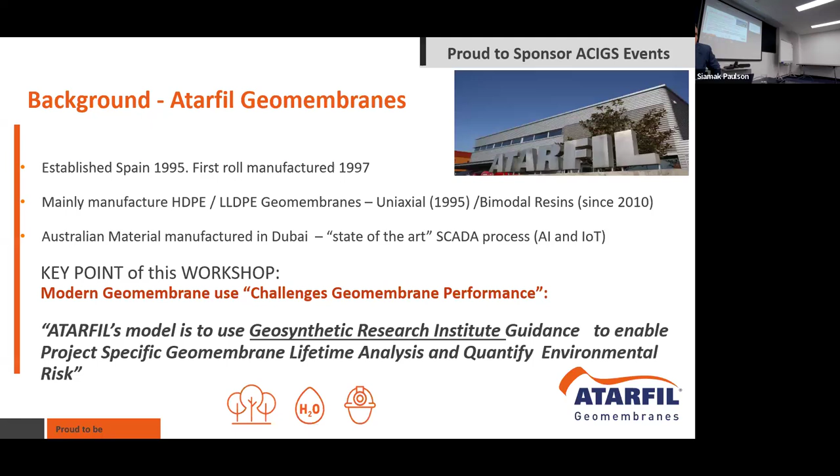But I guess the key point of this workshop is modern geomembrane use is challenging geomembrane performance, and that's both chemistry and modelling and leakage rate analysis wise as well. So really the Atarfil model is to use Geosynthetic Research Institute guidance to enable project-specific geomembrane life analysis, and that gives you the ability to quantify this liner's environmental risk over time.

There's a few challenges in geomembrane design, and I don't want to take George's thunder, but we see these as critical. GM42 talks about extreme project conditions, and that's always been a challenge for liner design because it crosses that boundary between civil engineering, geotechnical and polymer expertise.

So Atarfil have got a team of internal chemists, and we also consult external polymer laboratories like Excelplas fairly heavily. The other thing is, what properties do you test in a lab to try and replicate site conditions has always been a major challenge.

So traditional testing really means you're isolating chemistry and temperature versus UV versus oxidation in air and things like this. We're using parameters like stress crack, OIT and HPOIT. They're really indirect measures, but we're trying to model them quite closely to establish geomembrane life.

So the third challenge, and this is a big one for all designers, is how do we do this in project timeframes? When true performance benchmarks are projects in situ, your geomembrane in situ, or long-term immersion testing - I know Kerry Rowe will tell you 5 years is a good thing, but it's a challenging thing when you've got a project that's 3 weeks to 3 months in design.

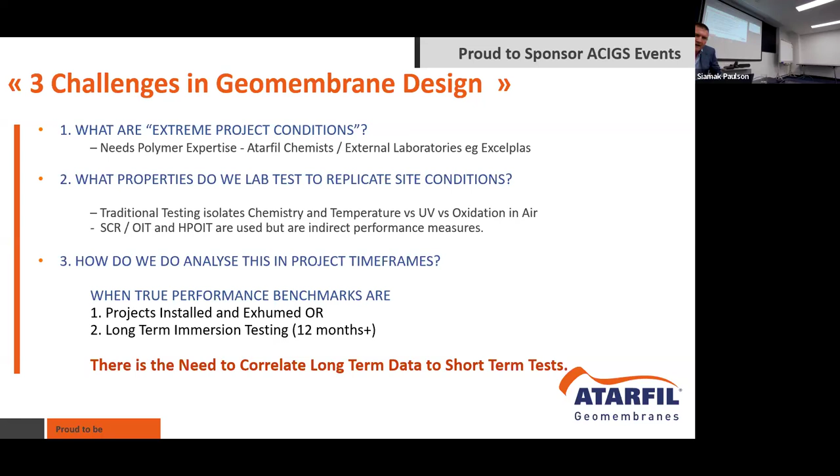So there's a need to correlate this long-term data to short-term tests, and it heavily involves what Atarfil do. The Atarfil solution to try and accommodate this is encouraging site coupons and encouraging exhumations wherever we've got projects installed. Sort of 30 years of project history is allowing us to correlate that. So we do undertake a lot of long-term immersions on your projects.

And the fundamental aim is to create site-specific geomembrane recipes. We've modelled the ageing, we try and create the recipe to suit. So the second aspect of it is project timeframes. We try and correlate long-term tests, all these exhumations, these immersions to short-term testing options.

And we've spent heavily to investigate new rapid test methods that George will talk further about today. Stress is a constant problem, it's very hard to account for. It's virtually eliminate or mitigate's the only option.

And this is why Atarfil replicate their resins and their manufacturing process around the world. It basically results in HDPE geomembranes with stress cracks in the range of 5,000 to 8,000 hours, which we see as important. It gives us that minimum stress benchmark.

So just a summary of projects today: we've just crossed 50 projects with site-specific analysis, correlating both short and long-term testing. That's immersions and things like thin film.

The immersions include bauxite residue disposals, caustic bladders, heap leach, a lot of base metals, CIL type processes, rare earths, and coal seam gas brines of varying concentrations. This enables robust predictions of geomembrane performance. We're not saying they're the ultimate, but we feel like they're getting more robust as we develop better and better methods to analyse them.

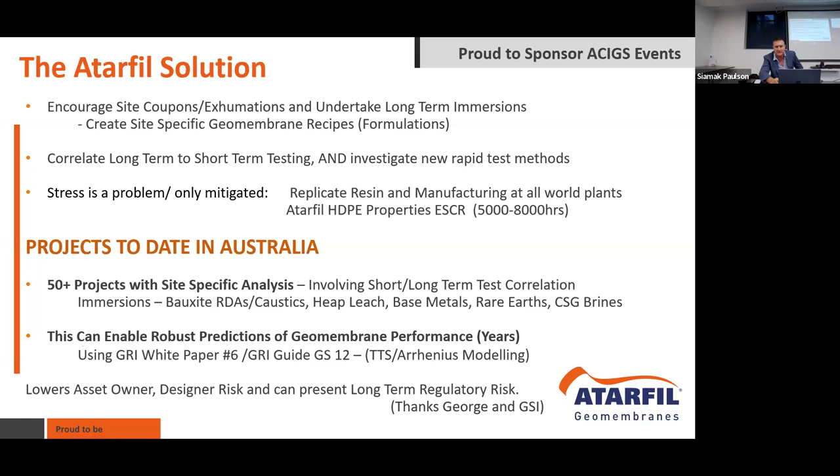Some of the accelerated testing programs, and we welcome your involvement. We're building quite a large library of chemical immersions, trying to correlate long-term to short-term data, whether that be traditional pot immersions or thin film immersions.

Stress crack resistance is a bugbear of ours and a bugbear of the industry. I'm interested to see what George is going to talk further about today. We find it ideal because we've got these resins at 5,000 hours plus. We've got to use short-term methods to really account for this in MQC. We find a challenge to correlate across resin formulations, so I'm looking forward to George's discussion on that.

So a work we've been working heavily is deformulating, essentially fingerprinting these geomembranes. Rather than doing bulk OIT and HPOIT loss, we're looking at specific reaction rate loss of specific additives in the actual polyethylene. And it can give you really robust measures of project predictions.

Particularly if you do it pre and post long-term immersion, you get a great sense of what's driving performance of the liner over time. And we also do it pre and post welding - the reason we do that is you can imagine you're welding at 400 degrees, you want to know what additives are being consumed at those temperatures. But all of these enable more robust predictions of geomembrane life, and it's the Atarfil ethos.

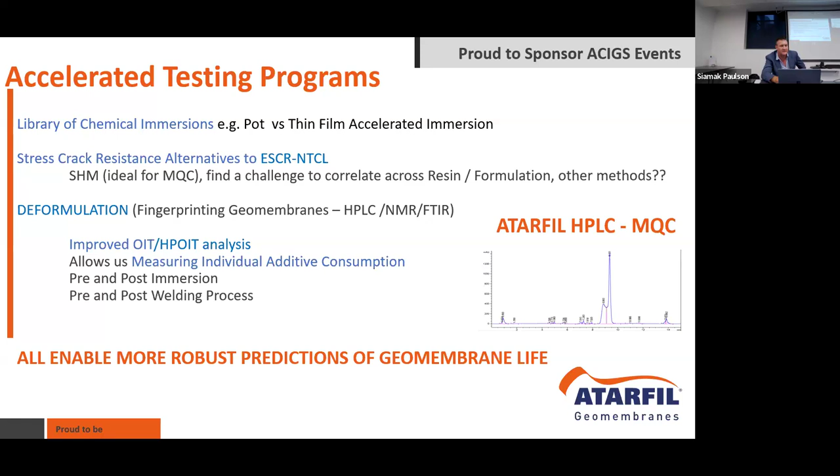So really the underlying conclusion from Atarfil is we embrace site-specific analysis, we pursue it, we feel like we can do it robustly and in increasingly shorter timeframes. It's not perfect, but it's improving. But all of these techniques were built on Geosynthetic Research Institute advice, which is why these webinars are important—using the GM13, a remarkable benchmark standard for years, the new GM42, and these lifetime prediction models. So I'd say to George, congratulations, the Geosynthetic Research Institute has left a remarkable legacy in the world of geosynthetics, and thank you to you, Bob, Grace and GSI, and welcome to Australia, George.

Thank you so much. Thank you.

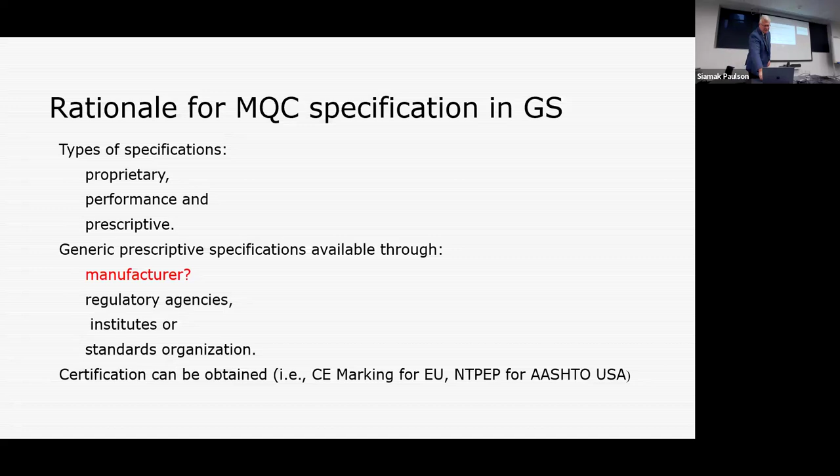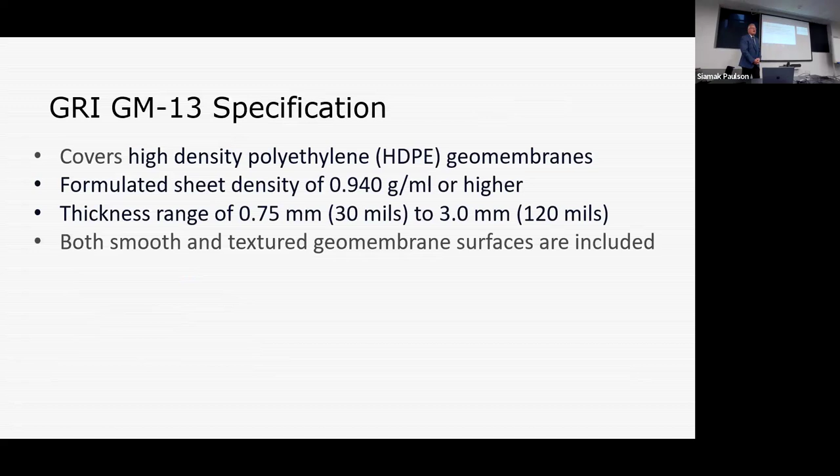What's been out there? And Mark, thank you for setting the stage, very well done, and thanks for the compliment. GRI GM13 has served us very well. It's been the standard bearer for HDPE, a manufacturer quality control specification broken down into physical, mechanical, chemical, and endurance properties.

Mark touched on this—look at the times, 90 days. Are you going to wait around for three months for this? Can we do better? No, it's hard.

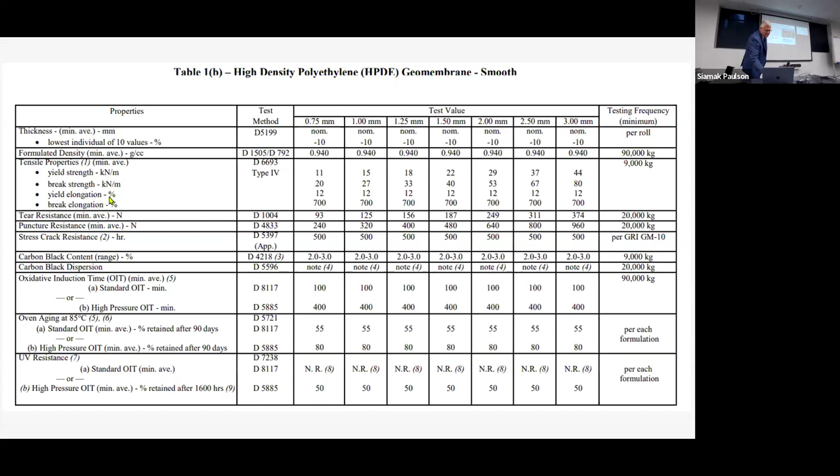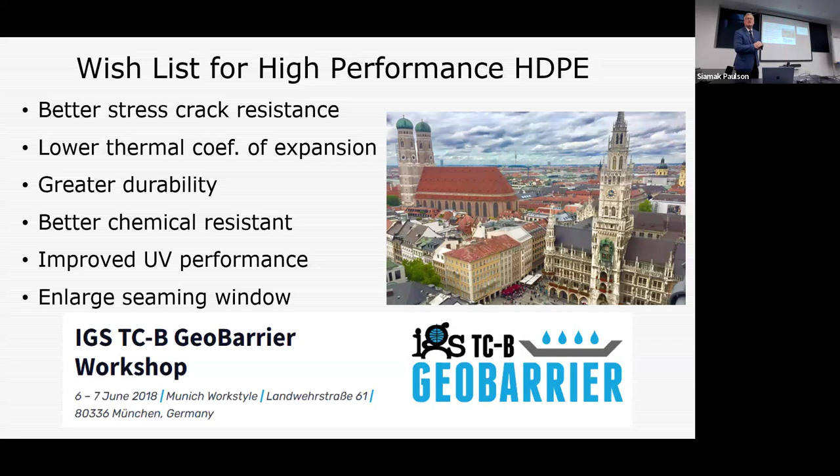We met in 2018 with the objective to do better. Several people were there, I believe—Alex was there. So: better stress cracking, lower thermal coefficient of expansion, greater durability, better chemical resistance, improved UV performance, enlarge the seaming window. That was sort of the menu set out in front of us, and we tried to achieve this going forward with new geosynthetics.

And it was touched on by Mark very quickly—he called it a unimodal versus a bimodal resin, but the big advance now is this camel hump in the molecular weight distribution. Have we been trying to do that in our industry over time? Of course, we've blended HDPE with low density polyethylene for years, but not in a reactor. Now we have the ability—we've stolen it from the pipe industry, but that's where these resin formulations come from.

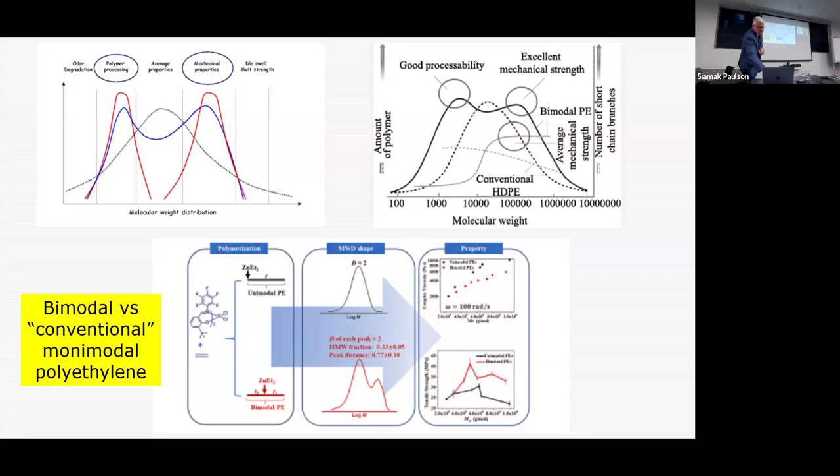There are additives in here, okay, and the additives serve multiple purposes. Processing aids and stabilization packages are namely it. These additive packages have two hitters—the big one is the hindered amine light stabilizer.

Australia is important—you guys publish things and it rattles the whole rest of the world. You are on the forefront of geosynthetic toxicity.

This shakes me to my marrow, but I have to hit this dead on. The articles that came out of GNA were twofold, okay, and they attacked the stabilization packages that work absolutely best with these GRI GM42 materials—the Irganox and Irgafos, as well as the HALS. These articles went all the way up to the US EPA. There's a trade-off with these polymers, and these stabilization packages are not good for the environment, but there's an idea of encapsulation which is used. On this topic, there will be a seminar at Queen's University at the end of the month addressing exactly this. We address these articles from GNA twofold, and the big hitters down here—HALS and antioxidants—are used in a wide variety of plastics, not just geosynthetics. It may make sense to consider certification of geosynthetics used in potable water or aquaculture.

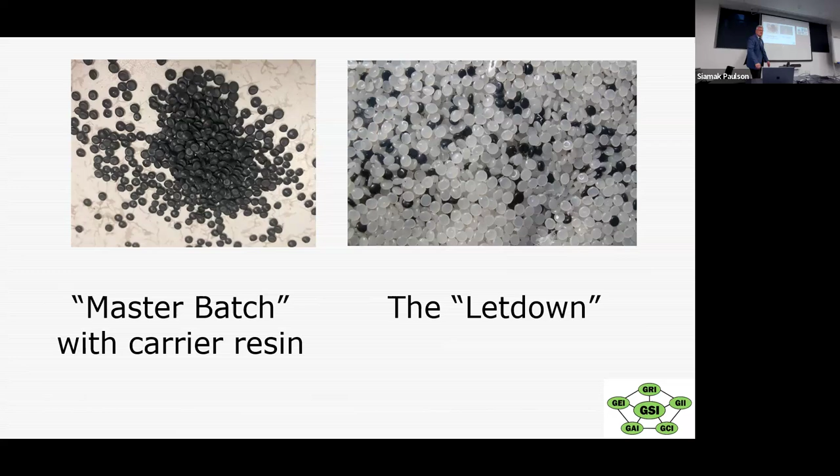And then you have to confront the ugliness of the regrind, the rework. I see Graham smiling. The post-consumer material, the talc. All of these things are going to compromise the long-term durability of the material. The material that we're talking about in GM13 and GM42 are first-rate materials. They possibly have reworked material in it from edge trim, but nothing else in there. Nothing leaves the factory.

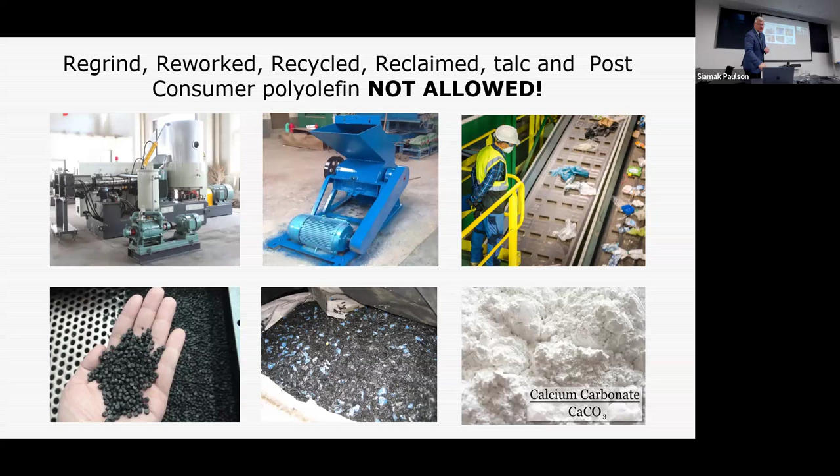Okay, the first item I'd like to talk to you about is stress cracking. Mark, you eloquently set this up. It was very nicely done. This has been the bane of the existence of HDPE. Stress cracking is real. We've had several case histories of it. We chase it away by the environmental stress crack test, or single point notch constant tension load test.

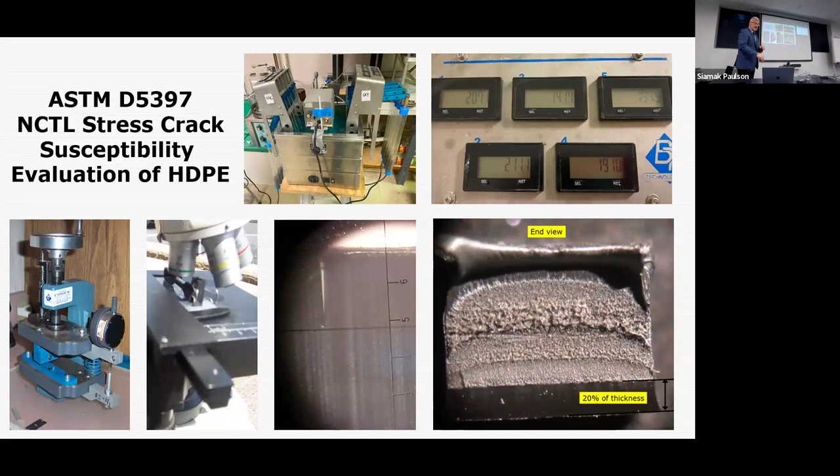I've been conducting this test for 40 years. I've been polluting the environment for 40 years. The Igepal CO 630 has a benzene ring contained in it.

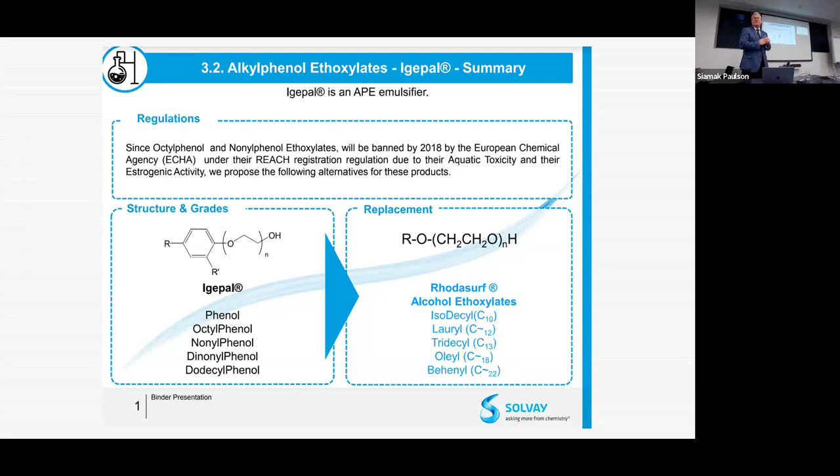For the last 4 years, we've been trying for a replacement surfactant. We have it. Thank you very much to the Germans and CEN, and a huge cooperation from the Spanish as well in Europe. But it's under the REACH directive that this surfactant is no longer allowed to be used.

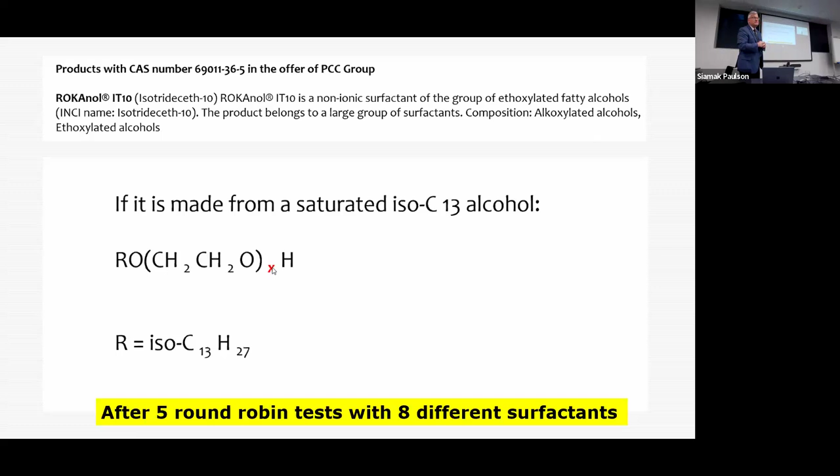The replacement surfactant is from PCC Group. It's a Rokanol material, and it gives a fantastic response. A total of 5 round robins and 8 different surfactants were tried around the world with this, and the one that worked best is this Rokanol.

It worked from 3 different membranes: a pipe resin, old National Seal which is a Union Carbide resin, and this bimodal resin, a GM42. And this is the matching of the Igepal CO630 with the Rokanol material.

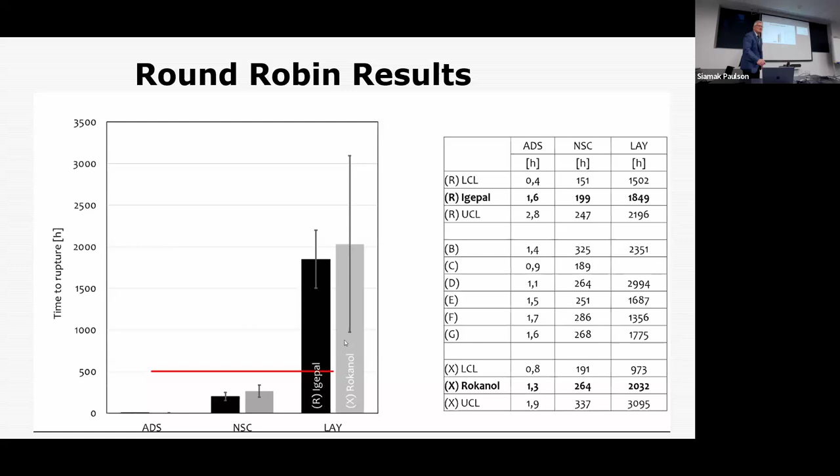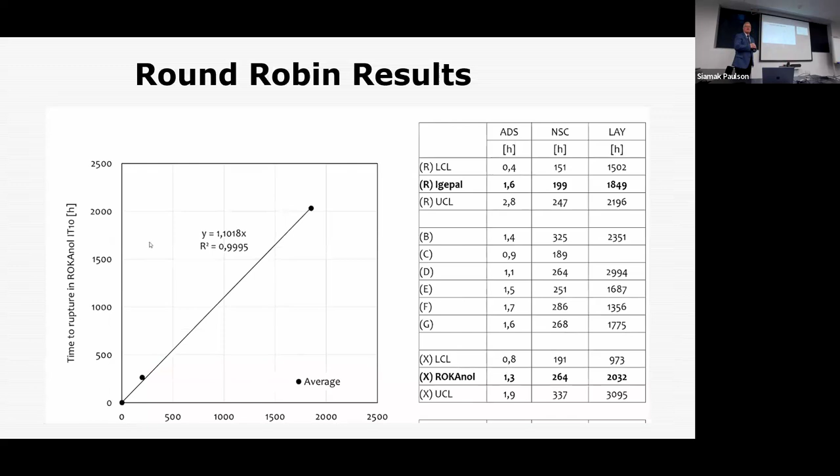And I congratulate the Europeans very much for doing it. It's available through PCC Exol, and I'm in charge of ASTM D35. So the single point notch constant tension load test will switch to this surfactant next month.

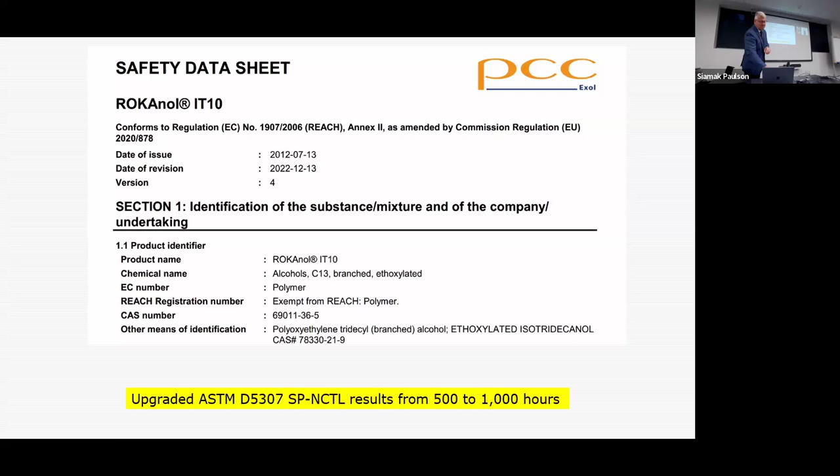The next point was, we can't wait that long, especially for the high grade materials. So why don't we move now to strain hardening modulus? It will at least give you some ability, from a manufacturer quality control standpoint, to know if you're in the right house. Might not be in the right seat, but you'd certainly be in the right house.

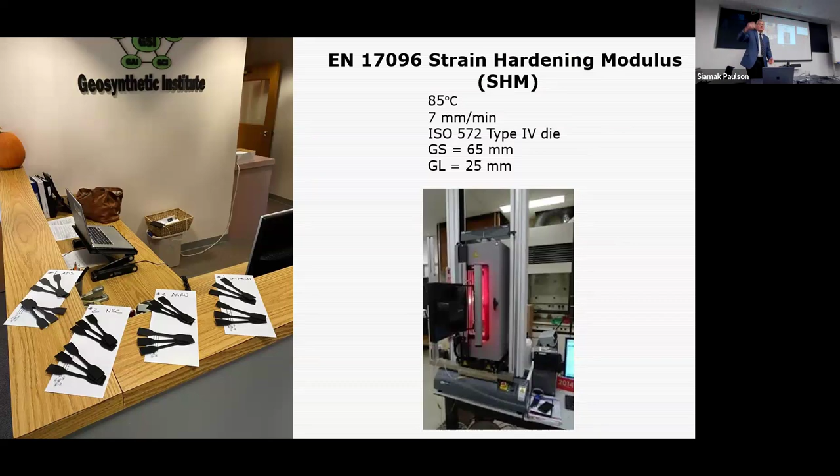And this is strain hardening modulus. It's conducted at an elevated temperature on a continuous rate of extension machine, a very prescriptive way to run the test. And you'll develop from this a load deflection plot, and you're very interested in the slope of this tail end of the curve.

Okay, the steeper the slope, the better the stress cracking resistance. So as steep as you can make that, the better.

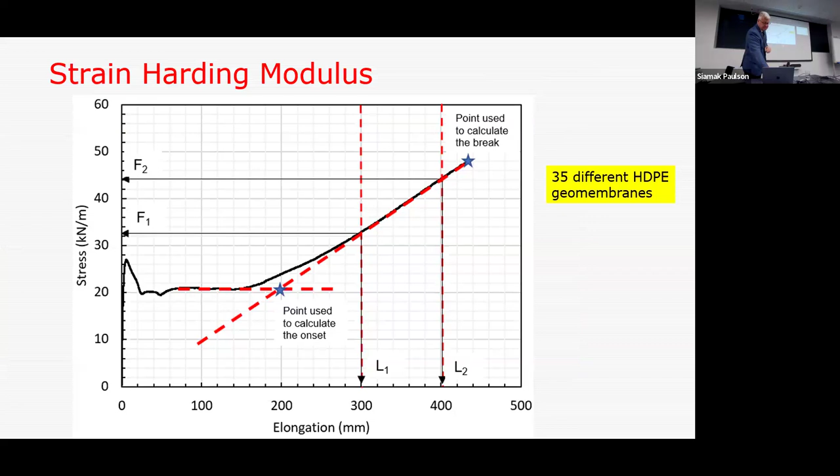This is 4 years worth of work. So this is a correlation between strain hardening modulus and single point notch constant tension load. 35 samples. It's not nearly as good as the stress crack data that I saw. R squared is 0.74, but it's the best we have. You'll see the interception here for the GRI.

GM13 or 500 hours, be around a strain hardening modulus of 30. GM42 is up around 1,000, and that number would be close to 40. So keep that in the back of your mind when you see the rest of the specification.

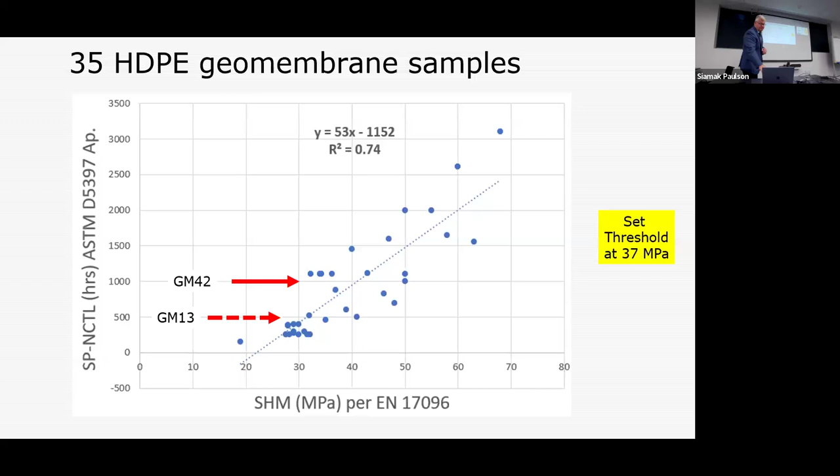The Geosynthetic Institute in 2023 led a contract for $100,000 US, and it was to do the work to support this specification. The industry participation, as well as the resins that were used, were part of this investigation.

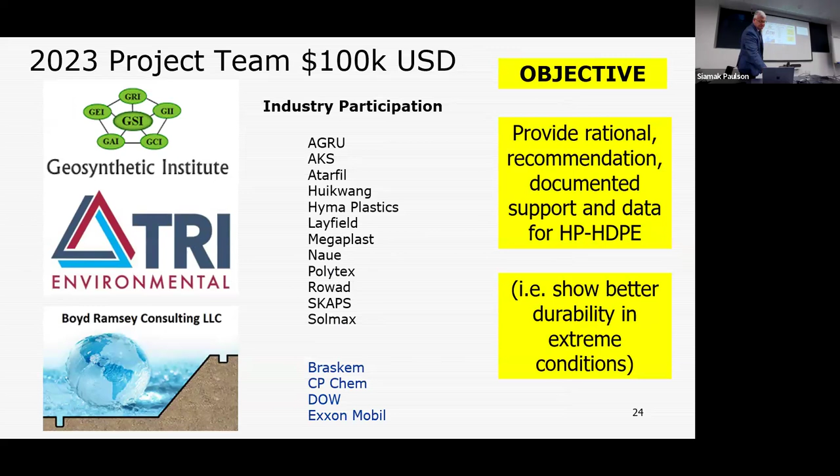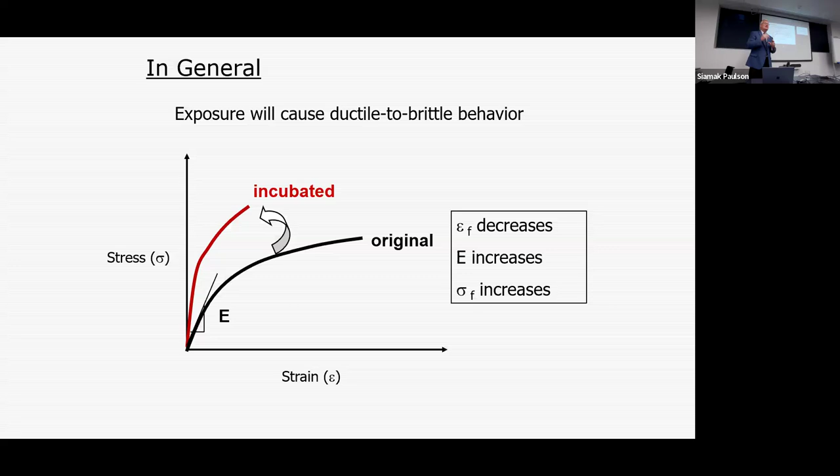Mark said it perfectly, it's just taken too long. We can't wait 30, 60, 90, 120 days to see this. We need to do something at this 30-day mark. That has to be the threshold number, that's about as long as we can wait.

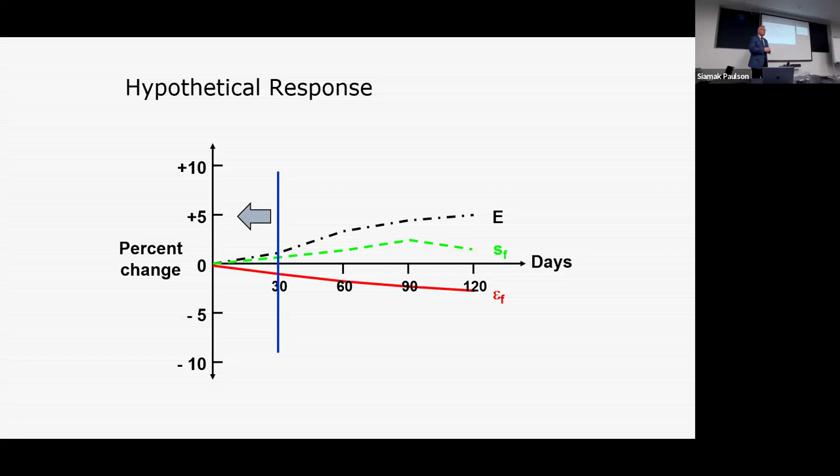Materials that were used. So now there's a leap of faith: these materials in their conventional thicknesses can't possibly be tested in that short a time frame.

So what we're doing is taking these materials, grinding them, and then creating a plaque of a thin film, and now we're going to do the exposure on that. Oh, I see some long faces - maybe people don't believe it. You must be very good at this. You need to make that plaque very well and have a very keen interest in this.

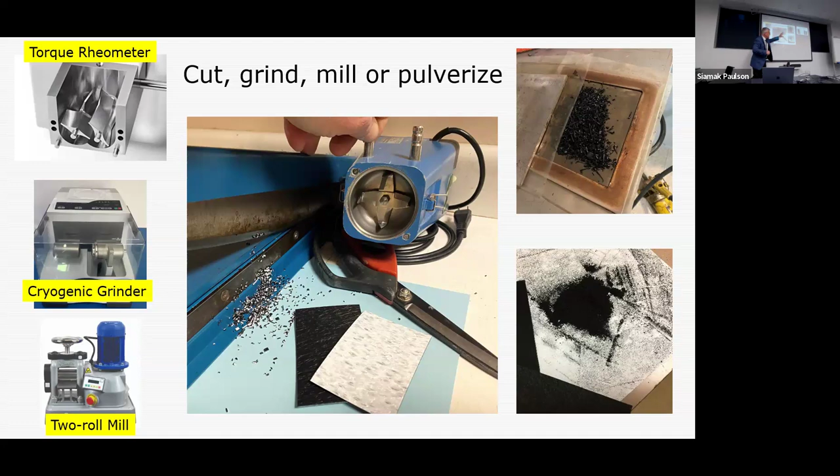You can crush this material. Please realize that a lot of these materials are made either on blown film or cast lines, and they're multi-layers. So you'll grind this using one of three methods: torque rheometer, cryogenic grinder, or two-roll mill. You'll take this and form a powder, then create a plaque.

And 42 does not stand alone - it takes 40 to make the plaque, and then 41 you'll hear about in just a minute. This is GRI GM40, and this is making that 0.25 millimeter plaque.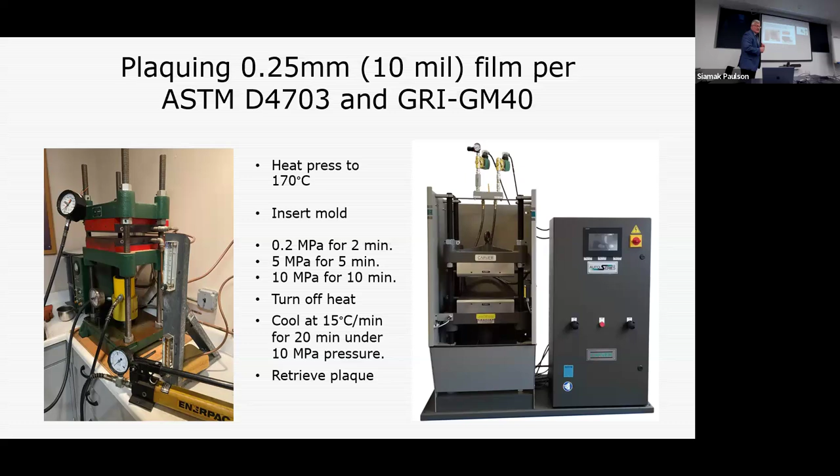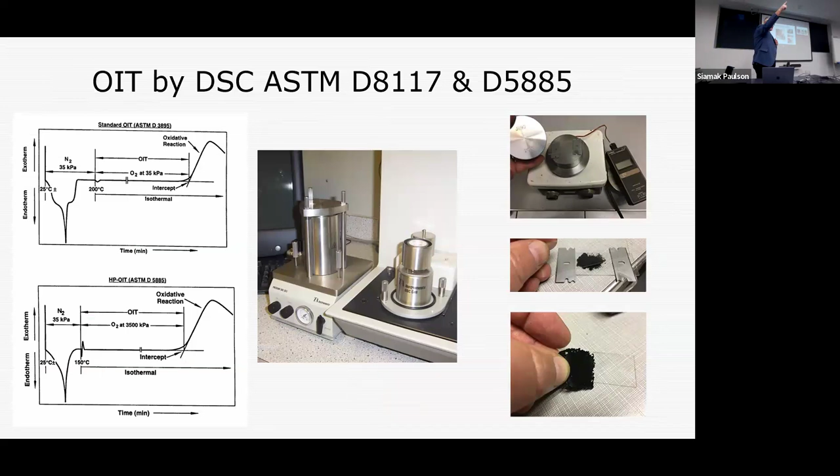You're going to take that film that you made during this plaque, and then you're going to start by annealing this. You'll have to take the baseline OIT, and the OIT is not an 'or' now - it's an 'and.' So you'll do standard OIT and high pressure OIT.

You will then take that film and anneal it. This annealing process is reagent grade water, very clean water, at 85 degrees C for 2 days. You will anneal that material, and now you will do the exposure on that material.

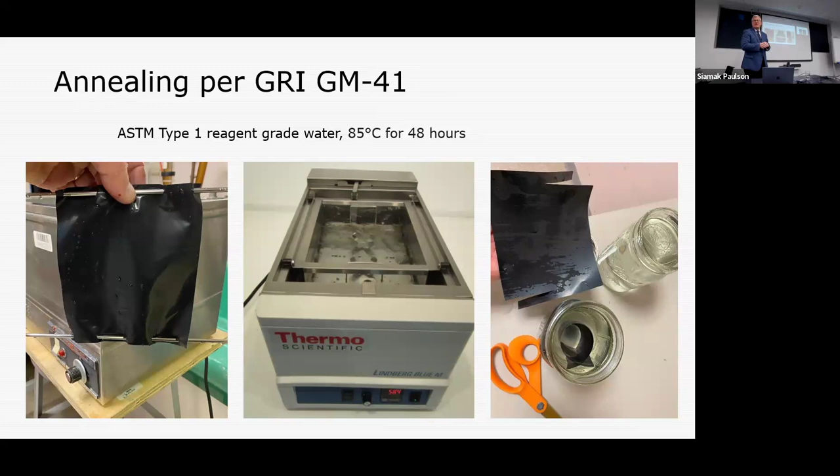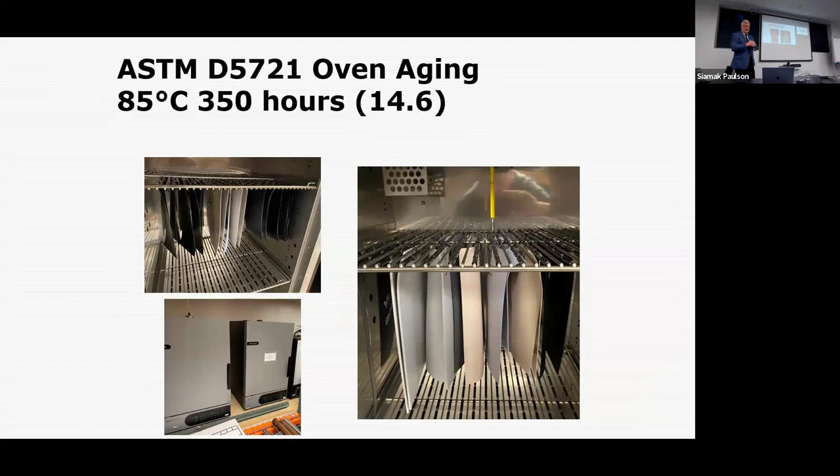There are 3 exposures. The first one is oven aging, which you're very familiar with, at 85 degrees C. You're doing it for about 15 days, 2 weeks. You have the OIT at time 0, and you're going to compare that with OIT after 350 hours, or 15 days.

That's what 25 samples look like. The thresholds are drawn here, and you'll see for standard it's 55%, and for high pressure it's 80% as the threshold. There's a couple weak ones in there - number 8, number 18, number 25. Keep those in mind because you're going to see them 2 more times.

But they are not GM13 materials, so they were the ones that we would know would fail. But the system seems to be working. Some very good ones we know are in there, but that's all hidden.

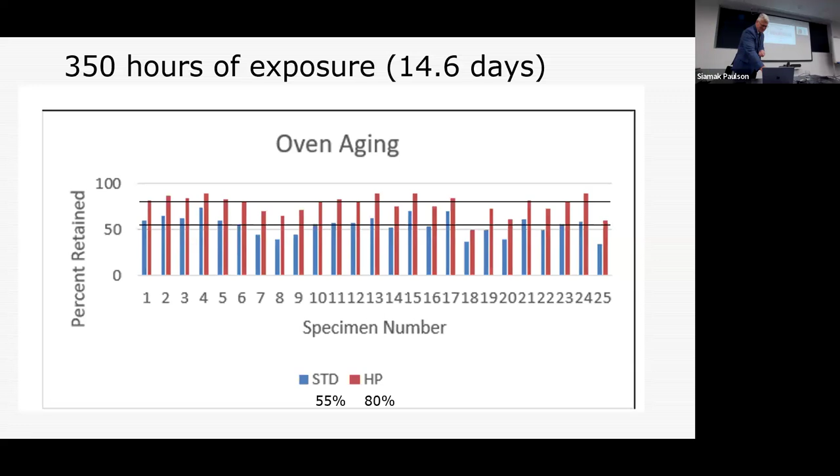The next is probably the best of the weathering tests, in my opinion: it's UV fluorescent, typically done in a QUV device, a weatherometer. It is controlled with calibration and internal reference materials, and unfortunately you can only run high pressure OIT on this - you don't run standard. Here you see the percent retained. Standard is not recommended, and there's a 50% retained threshold here for UV fluorescent.

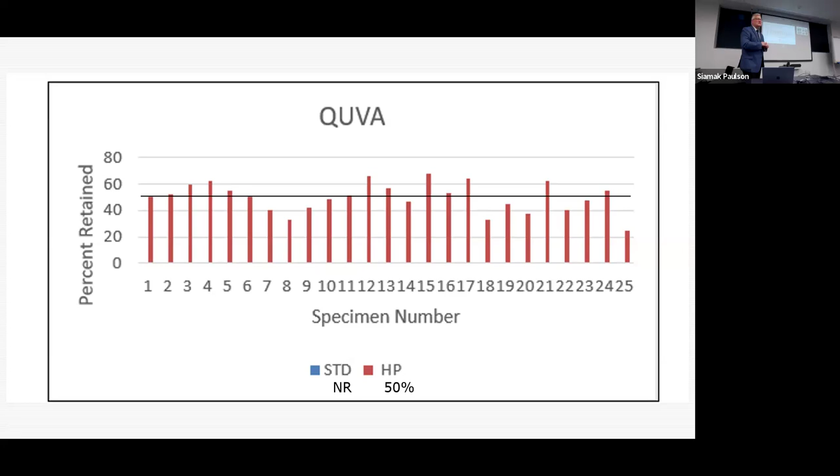The next test, which is not akin to GM13, is chlorine. Chlorine is only run at 50 degrees C. Those that remember chemistry know it's a halogen - it's an aggressive material to any olefin, and it is at 10 ppm solution.

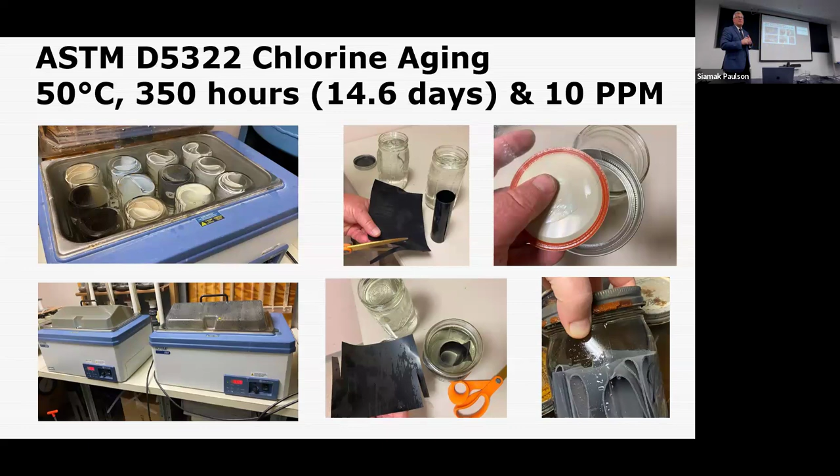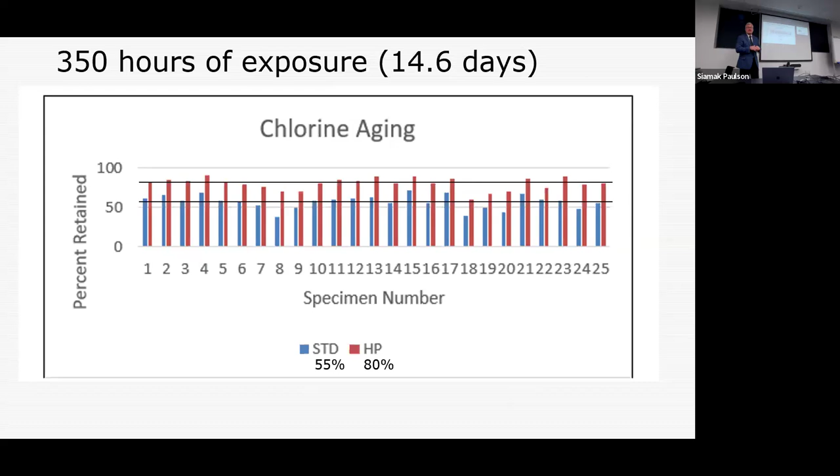Again, the series of data here - you can run standard and high pressure. And again it works very well if you look at 8, 18, and 25. So we have a way to challenge this material on a short-term basis quite effectively.

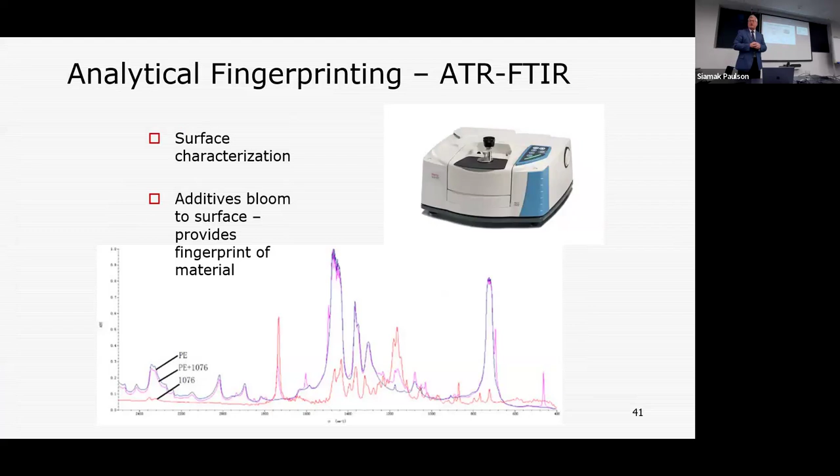In addition to that, thin films can be analyzed quite readily. They can be done in gas chromatograph mass spec, and they can also be analyzed with FTIR. So to your liking, it's much easier with the analysis of thin films versus the entire membrane. So you have extra forensics available to you.

So the specification now covers high density polyethylene - please realize 0.945 or better - thicknesses, smooth and textured. How do we compare versus GM13?

Better stress cracking resistance - got that one easy. Lower coefficient of thermal expansion and contraction, yes. Greater durability, we think so. Better chemical resistance, yes. Improved UV performance.

I was hoping Fred Gassner would be here because we were in Munich together with him. I didn't get an enlarged seaming window. Believe it or not, the seaming window is more compact with this, so it'll be harder to install because of that. The seaming window is not as large, and I see the Leister fellow shaking his head, so we're in agreement with you.

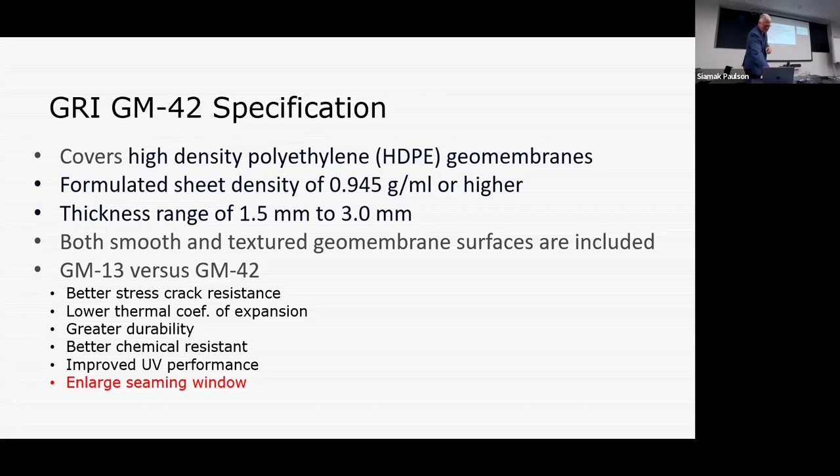So this specification, I realize this is rather small, but the stars show you the change versus the GM13 number. There are no thin millages that are allowed here - 1.5 millimeter is where the table starts. So all the thin millages have been removed.

The next thing is the density. The density is higher than what was broadcasted in GM13. You have to give up something, and one thing you give up is the break elongation value - that's only at 500%. So that's not as long, not as big.

Stress crack, it's up to 1,000 hours. Strain hardening modulus is at 37 megapascals. Carbon black is 2 to 3%, but the carbon black dispersion is either category 1 or 2 - there's no allowance for category 3. It's a better quality carbon.

You have an AND for standard and high pressure. It's run on everything, and then it's 3 different things: oven aging, UV, and chlorine testing. And I've shown you the data for that. So it's a new day for this material.

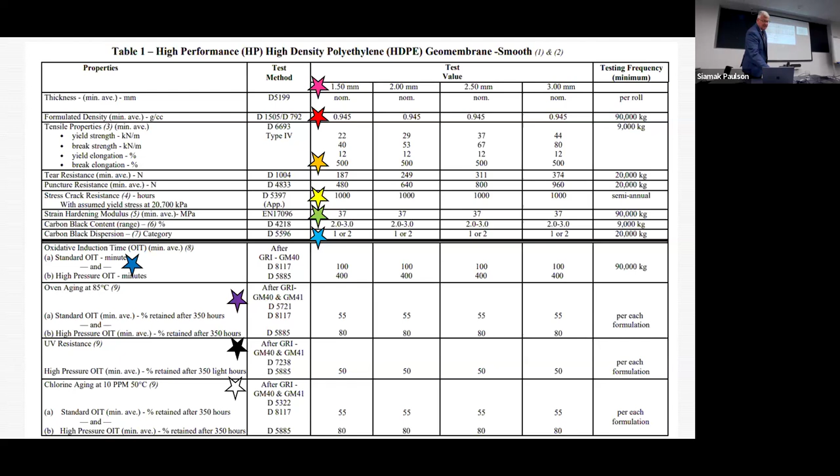I should talk to you about every specification for geomembranes - all 13 of them have changed at the Institute. They used to be covered under a seaming specification of GRI 19A and 19B. This will all be deprecated. Each one of the seaming characteristics will be in an appendices to the specification, and this includes GRI 13 and GRI 42.

The appendix - I don't know if there's a lawyer in the room, but in the States, the appendices you cannot be held to. So the body of the text is what a manufacturer is liable for, and that's how you absolve yourself from the seam specification. That is extremely important. The responsibility of the seam is the installer, not the manufacturer. It's a nice fine point.

Called out 3 different items: strength, deflection, and locus of break in both the ASTM and ISO. Everything will be moved to the appendices. I spoke to this and will deprecate 19A and 19B.

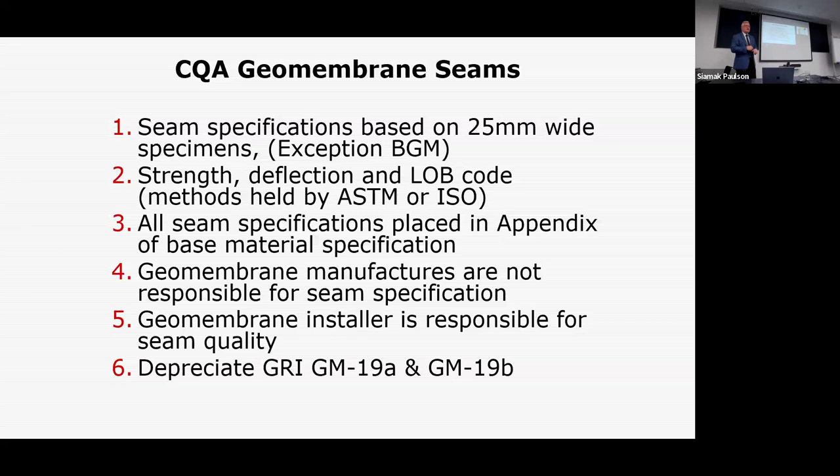I was asked to talk about the future of GSI. Mark, you gave me such compliments. It is changing - I will step down as director of the Institute next year. So this is my last year as the director.

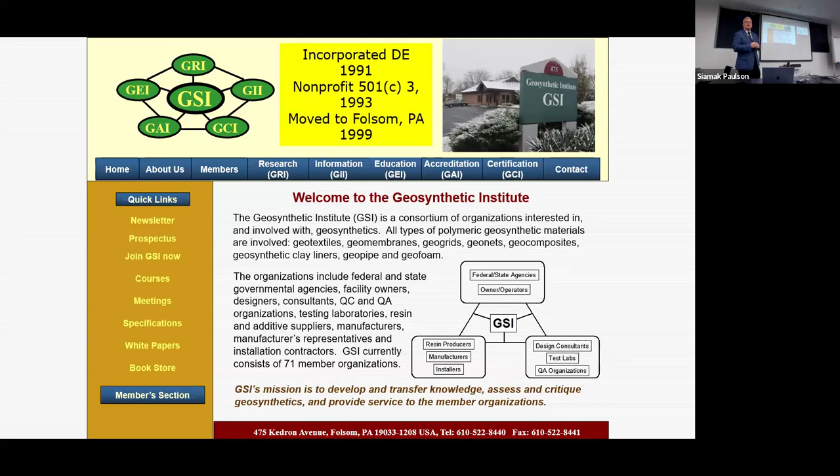Our mission is certainly to service the member companies. So what will happen to the Institute? The Institute is very active. GSI is the mothership, and under its umbrella is research, education, information, accreditation, and certification. The research is extremely active, but the big emphasis for us is durability. And you can imagine a lot of work has gone into making these specifications, and I think it will continue with that going forward.

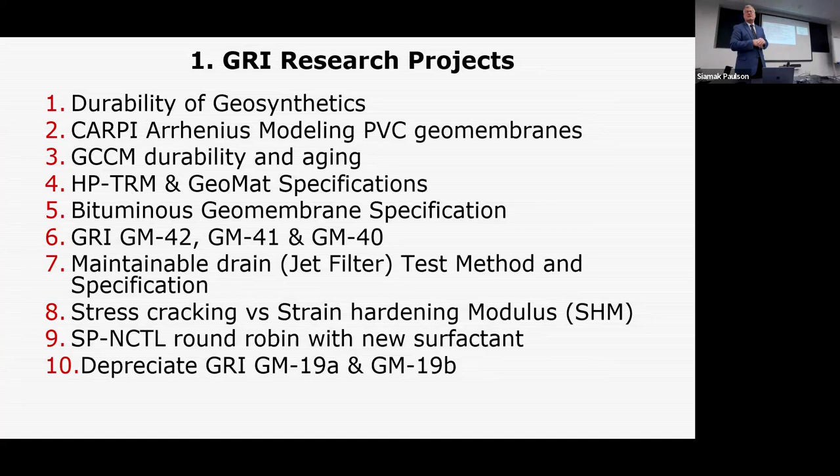In addition to that, education - we gladly do this. Thank you for the opportunity. It's a real privilege to speak to so many and so far around the world. We just take the opportunity any chance we get.

As far as information, our biggest effort is in the IGS handbook. This will be available - I'm editor of that. It will become available in September at EuroGeo.

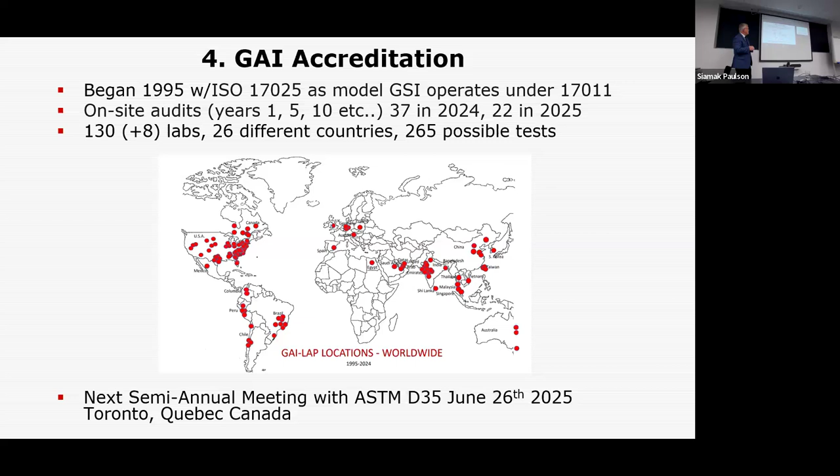So you'll see that. The accreditation is now well over 130 different laboratories around the world. It keeps me in frequent flyer miles. I'm here for 2 laboratories, Geofabrics and TRI, over the next 2 weeks. The next semi-annual audit will be in Toronto in June. You're welcome to attend, but this program has done very well.

As far as certification is concerned, there are 2,500 inspectors. Next week there'll be a course at TRI, and they have a group of people that will take the exam. But this is where the rubber hits the road, where you have CQA inspectors.

Affiliated organizations - we used to have Taiwan, they no longer, Wayne Shea retired. Professor Zhan at Inha University is GSI Korea. GSI India is very strong with Betra. And now GSI Brazil has just come online. So Georgia Tech will move forward with that - the transition will go down to Georgia Tech in Atlanta, Georgia. It's the number 1 geotechnical school in the United States. So it has support from WSP and SGI, which are 2 laboratories, quite strong.

A fellow by the name of David Frost will be the new director of the Institute. This came about through a year-long ad hoc committee. 12 participated in a written proposal response, 4 people were given an oral presentation, and the winner was Georgia Tech, announced in December.

Public announcement at ASTM in Houston. Letters have been exchanged and they're having regular meetings. Public announcement in Louisville - Alex and I were there, discussed at the board of directors, and the board will all move down to Atlanta for a May meeting to see this transition take effect.

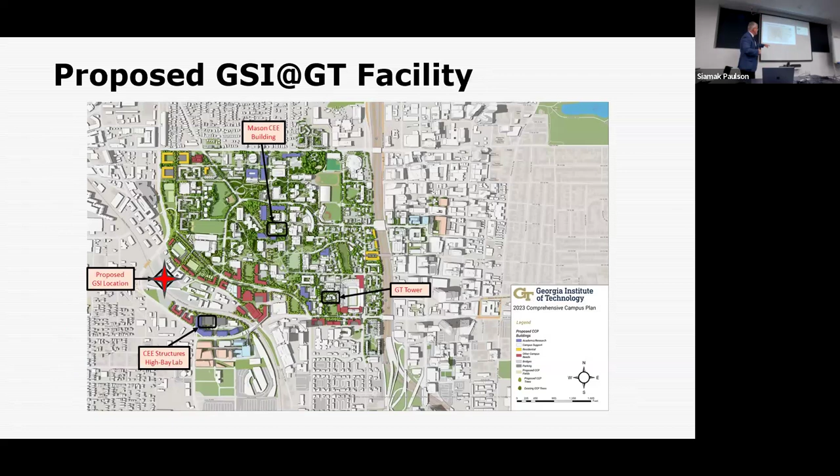Think of this as a nonprofit - it's just moving locations, but we'll stay active and grow going forward. This is an exciting time for geosynthetics. The new facility will be right on campus in downtown Atlanta. It's a little unfortunate it's on Main Street, but 600 Main Street will house the offices, and they're appropriating space. It's a bit small, but there are timelines through this. I've promised to stay through 2027, and this is how they'll transfer the operation going forward.

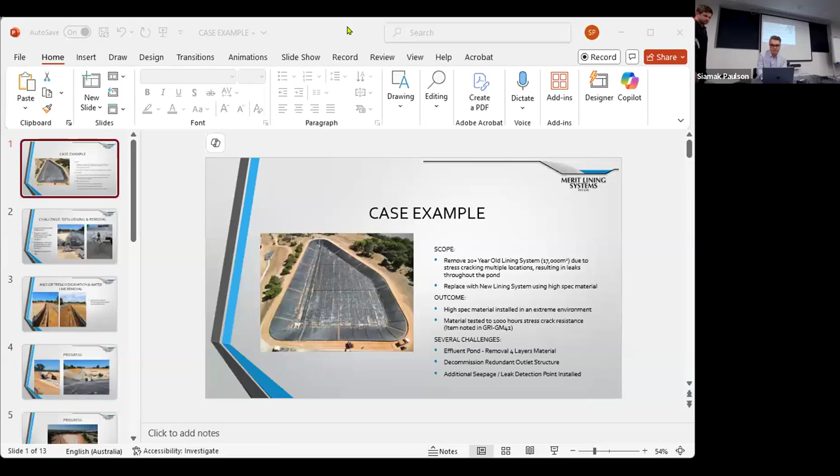It's, yeah, thanks, all good. Thank you. It's the space bar. Yes, or WordPad.

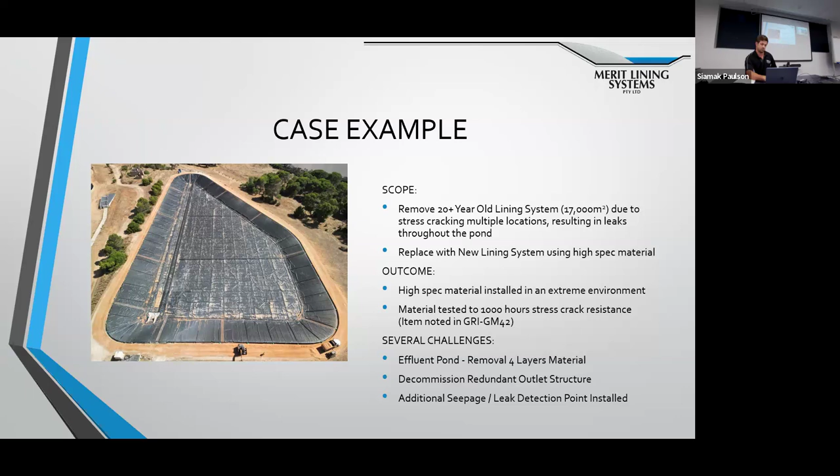First off, we had to remove the liner and desludge the effluent pond - you'll see on the right what the effluent looked like. This took about 4 days of washing and vacuuming using a sucker truck; we had a 10,000 litre sucker truck on site. In the background, you'll see the materials being removed, cut into manageable pieces and taken out with a telehandler, placed in skip bins. To manage the waste, we had regular skip bins almost daily to keep everything off site.

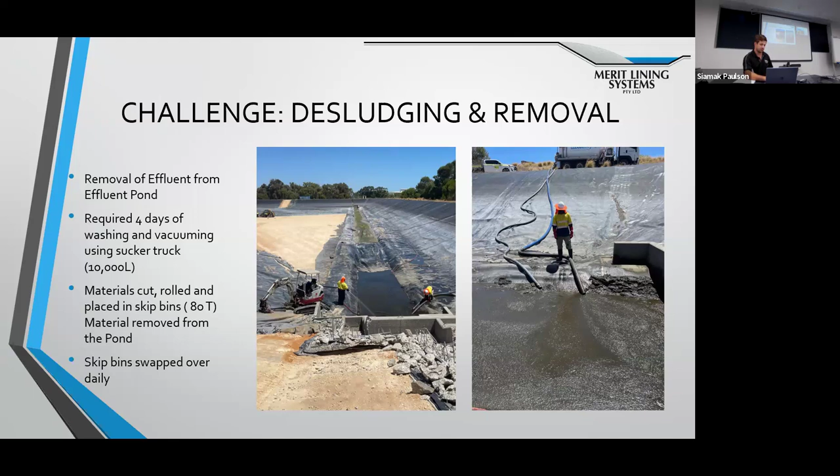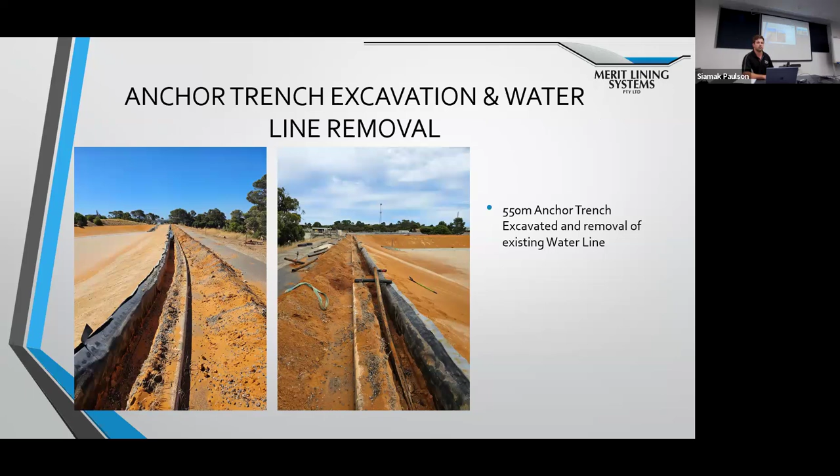Additionally, we had to remove the geomembrane from the anchor trench. There was 550 linear meters of anchor trench we had to open up, and in that trench there was an existing water line, which was removed.

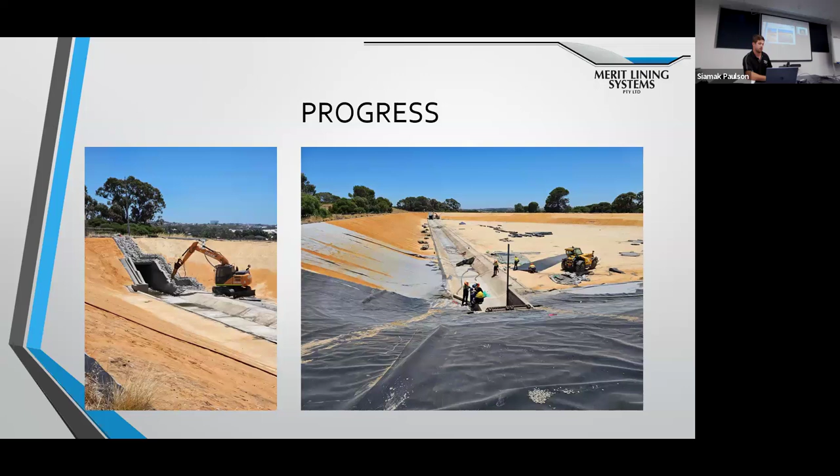You'll see some progress shots here, taken just prior to Christmas. On the left there's a concrete structure and an excavator with a rock breaker on it. This was an old outlet structure we had to decommission.

Here's a photo just following Christmas, prior to lining install. This is the old outlet structure our client asked us to decommission. In order to do this, MLS designed and built an engineered core-filled retaining wall.

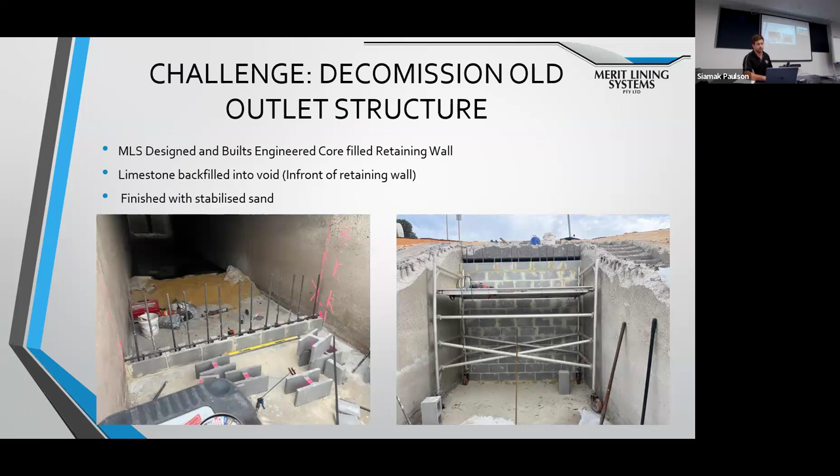You'll see it on the left, that's where we started. On the right, that was about a day later. Following that, we backfilled the void with limestone and finished off with stabilised sand to provide a smooth surface. On the left is the limestone and on the right, the stabilised sand.

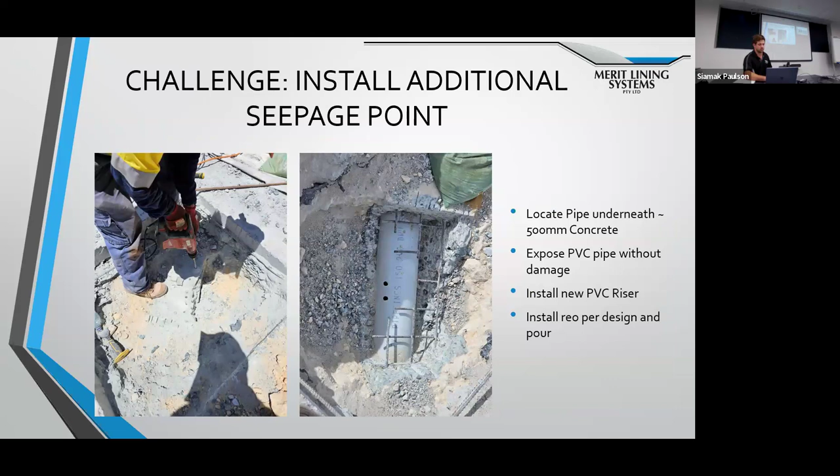Another challenge we had was installing the additional seepage point. We had to locate a pipe underneath 500 millimeters of concrete. To do this, we used a probe, exposed the pipe without damaging it, installed a new riser, and then had to install reo and concrete to finish off the seepage point.

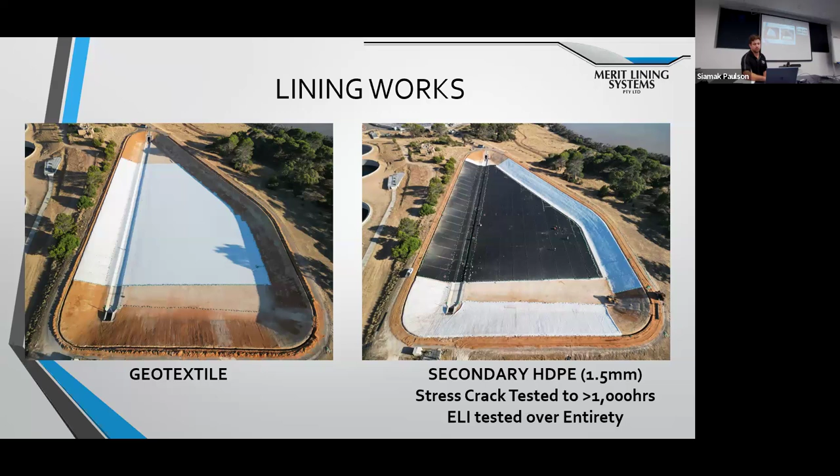So now to the lining works. There were 4 layers in this pond. On the left, the first layer geotextile; on the right, a secondary HDPE 1.5 mil. This material was stress crack tested to 1,000 hours and ELI tested over its entirety.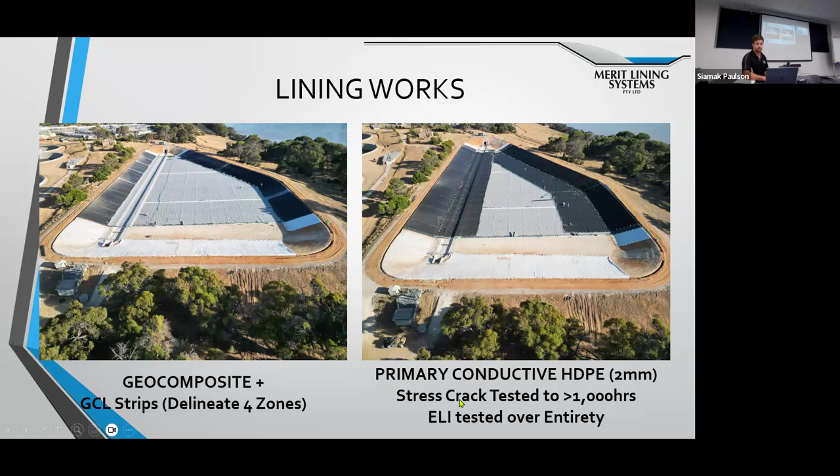The next layer was geocomposite as well as GCL strips, which delineated 4 leak zones. You've got one that runs up the low flow channel and then 2 across the pond. This allows the client, if ever there's a leak, to identify what zone it's coming from. On the right is the primary conductive layer, which went over the top, and this liner was again stress crack tested to over 1,000 hours. It was a 2 mil product and conductive, which allowed us to ELI test the final layer as well.

Lastly, we installed permanent ballast at 200 kilograms a linear meter. This ballast was installed directly above the GCL to provide a confining pressure. Should there ever be a leak, the GCL can swell in that area, allowing the leak to be delineated to the different zones. In total, there were 18 leak detection points across the 4 zones.

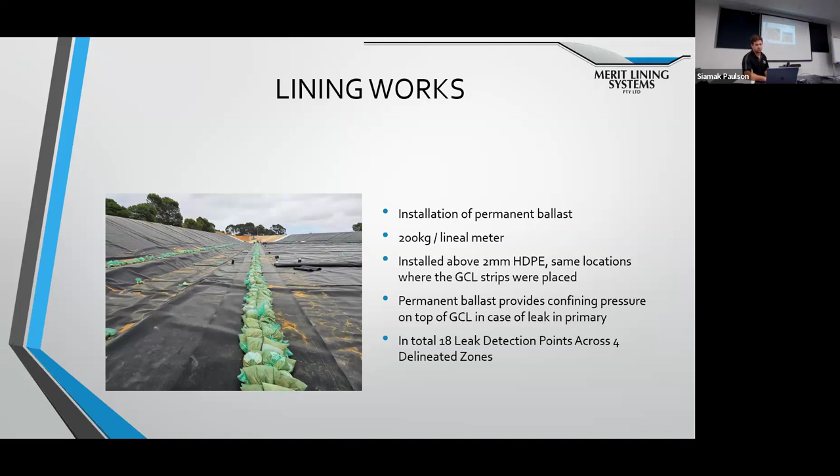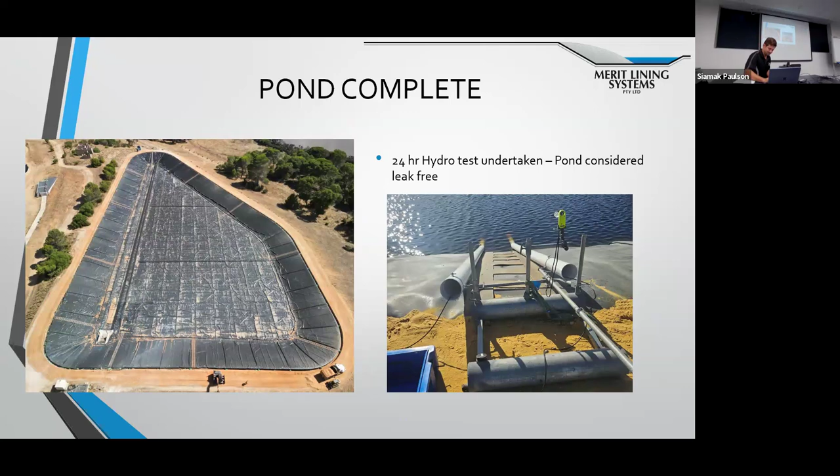Now, playing here, what I might do... Alicia, you can hear me still? Yes, all good. All right, so let's start with a question from those attending online, and then we'll go one online, one in person, to be fair. George, if you want to maybe sit next to me, I'll just move that chair so people can see you as well.